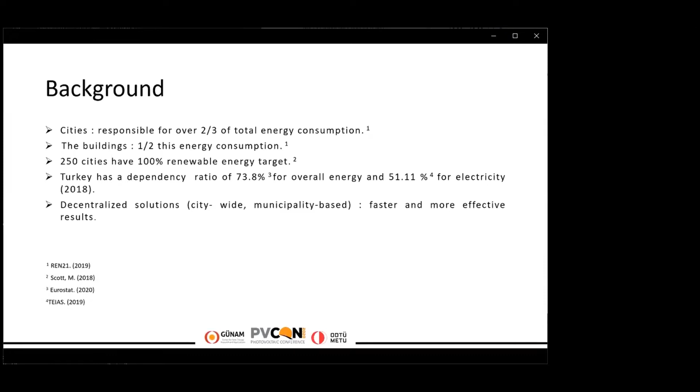Before going into the details of our study, I would like to mention some rooftop PV potential studies. As I said before, it is getting more common to use renewables, and there are some studies explicitly focusing on rooftop PV potential, such as in Spain, Italy, Germany, Israel, India, and Japan. Besides, some cities have strict regulations, such as Dezhou, Vienna, and Freiburg. For example, in Dezhou, China, almost every roof is covered in solar panels. In Vienna, it is obligatory to use rooftop PV in new buildings.

There are 2 studies about the PV potential in Turkey, and we wanted to contribute a city-based potential study, considering the fact that Ankara has a higher solar irradiation yield and more public buildings than most European cities. For these reasons, we want to propose an accurate methodology which is reliable, free, open-sourced, and most importantly, applicable to every type of roof.

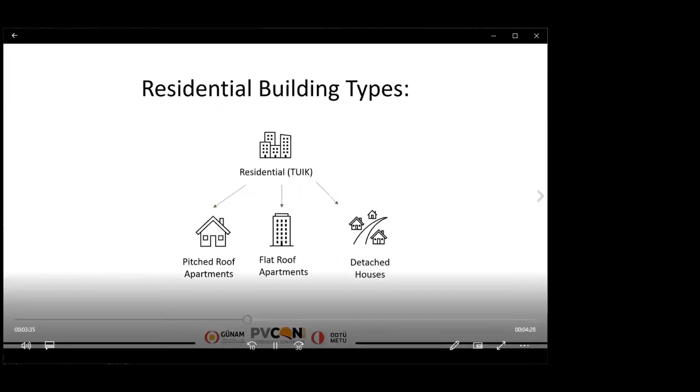In this study, we have used 3 types of residential buildings: pitched roof apartments, flat roof apartments, and detached houses. Since there are no specific data for roof areas, we have revised the data for residentials. We have calculated the floor base area of buildings by dividing the total building area by floor numbers. By doing so, we have assumed that floor base areas are equal to the roof areas. As a side note, we have only included buildings built after 2000 to make sure that we do not have any roof stability problems.

Let's have a closer look at our samples. The buildings are selected randomly from different parts of the city of Ankara. Among these samples, 12 of them are pitched roof high residential buildings, 2 of them are flat roof apartments, and 3 of them are detached houses. From the table you can see the rooftop type, number of floors, number of dwellings, and the roof area.

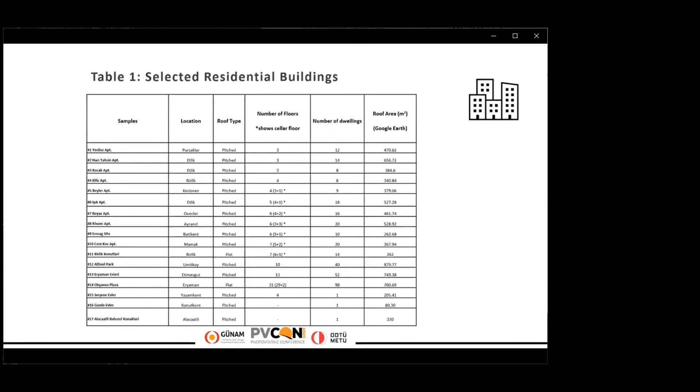For all samples, monocrystalline silicon, polycrystalline silicon, and bifacial modules are settled. For pitched roofs, modules are installed as flush mount, and the optimum tilt angle is selected as 32 degrees for Ankara. In order to reduce shading effects, we have calculated the row spacing by considering either the roof area or the module type.

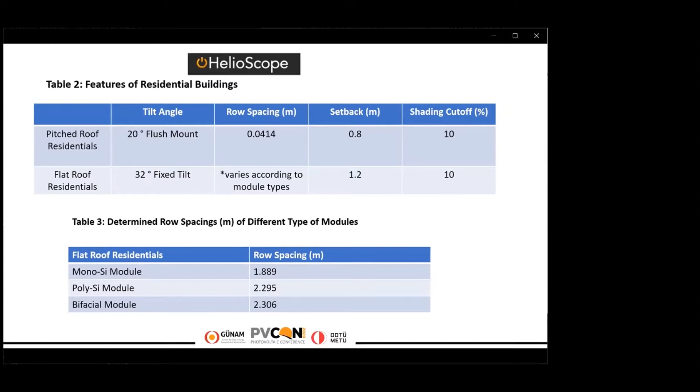Now, to make it more visual, I'd like to show you some pictures. Sample 1 is a high residential building roof, and sample 15 is a detached house. And you can see 3 different applications. First one is mono-Si application, second one is poly-Si application, and the last we have the bifacial application.

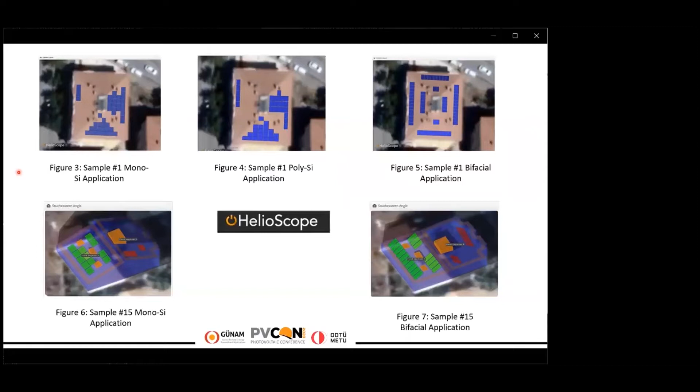The usual settlement for rooftop PV is that it's free of modules in the north side. Although this doesn't create too much difference in 4-segmented roofs, it creates a significant difference for bifacial PV in 2-segmented roofs. And we have used HelioScope tool for these simulations.

Here we can have a look at one of the applications. It is for monocrystalline silicon PV modules. Number of PV modules and the annual energy yield values came from the HelioScope application results. By multiplication of number of modules and the module area, we have found the usable area, and then the usable area ratio is found by the division of total roof area measured by Google Earth.

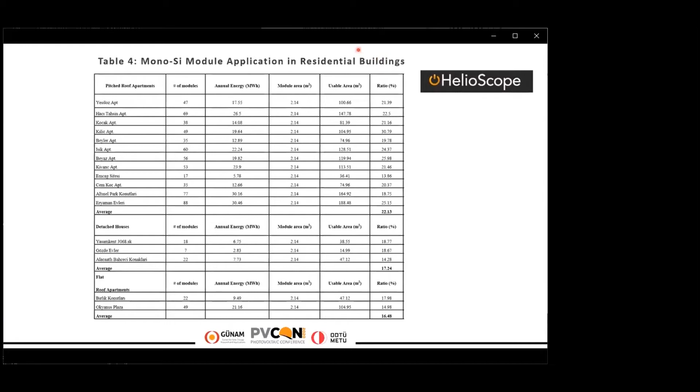After finding the suitable area constants, we reapply these constants to the total roof area with the help of TÜİK data. And what do we mean by that? The suitable area constants, which are found in table 4, are multiplied with the total floor area and the settleable module number in this area is found. Then the total energy is calculated for each module, since the yield is highly dependent on spacing, module area, and module types.

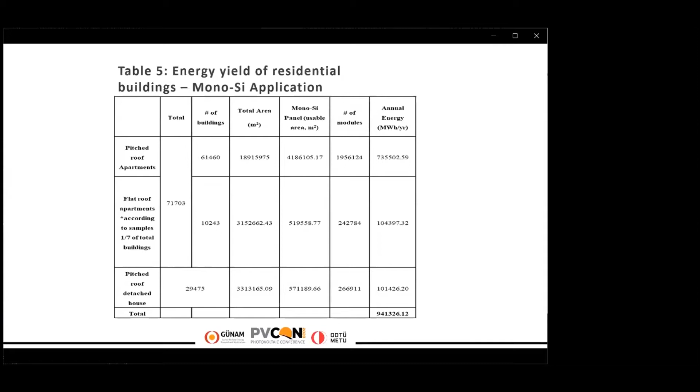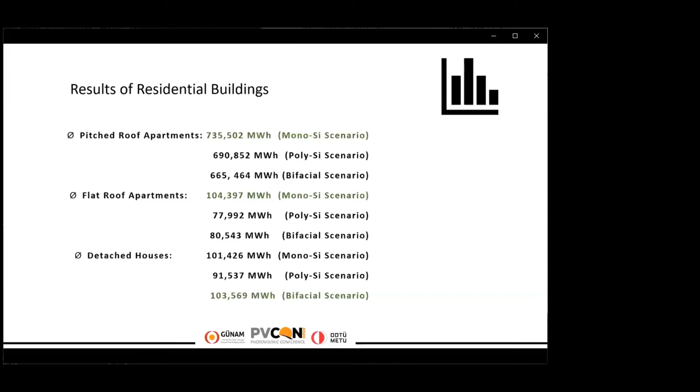Let me move on to the results of this study. You can see the results for the 3 different types of module application to 3 types of residential buildings. For pitched and flat roofs, monocrystalline silicon PV modules perform the best, and for the detached houses, it's the bifacial PV modules. As I said before, main difference occurs for bifacial PV in detached houses for 2-segmented roofs. But these results do not necessarily mean that one type of module is superior to the others. It shows how important the module size and row spacing are in limited roof area.

To conclude, we have performed an analysis to observe the rooftop solar potential in Ankara. Results show that the energy yield of the PV system is highly dependent on the building and its roof type. If the row spacing arrangement is done to the buildings individually, the potential would be higher due to the better settlement for shadings. Moreover, 2,500 buildings are added to Ankara every year, so we can say that the potential keeps increasing.

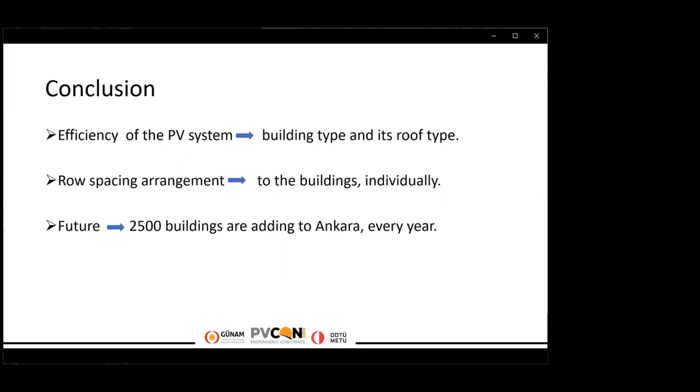For the future studies, we would like to complete this study on a much bigger scale, including more buildings for a longer period of time. Besides, a feasibility analysis will also be conducted to get a more realistic view of the rooftop solar potential.

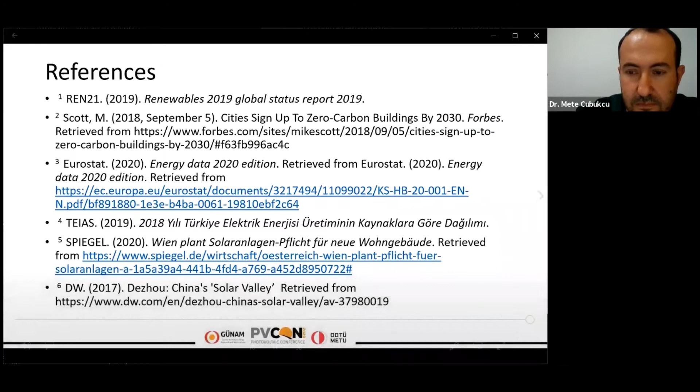I don't see any question on the message part, but I want to ask one question. When you share the results of your study, you have mentioned the megawatt hour production. So this is the energy production. What about the installed capacity of the PV systems according to your calculation?

Mhm. That was only the results of one application, one type. Are they right? I mean, normally when we mention this type of studies, we share first the installed capacity of the systems, then we can also share the predicted energy production. But I have just noticed you only share megawatt hour. Is it megawatt hour or just megawatt, the installed capacity?

No, it's megawatt hour, it's annual energy yield, and it is simulated results, so it's a theoretical study, we can say. Yeah, it's a prediction. We estimated it will be megawatt hours for annual energy production. Okay, thank you very much.

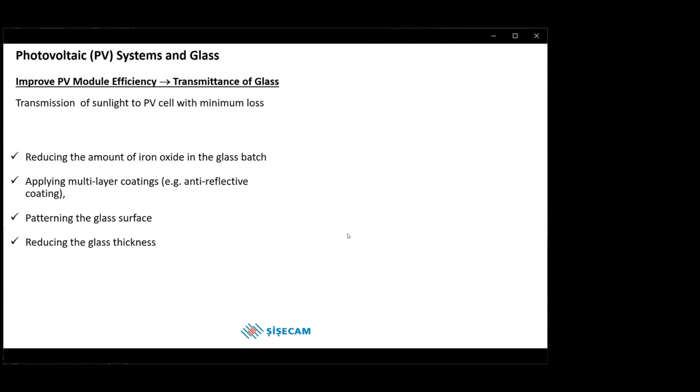The amount of produced energy in photovoltaic systems significantly depends on the properties of cover glass. It's always desired that the sun rays passing through the cover glass reach the cell with the least possible loss. To get higher efficiency from photovoltaic systems, studies are concentrated on different strategies, such as reducing the amount of iron oxide in the glass batch, applying multilayer coatings like anti-reflective coatings, and patterning the glass surface.

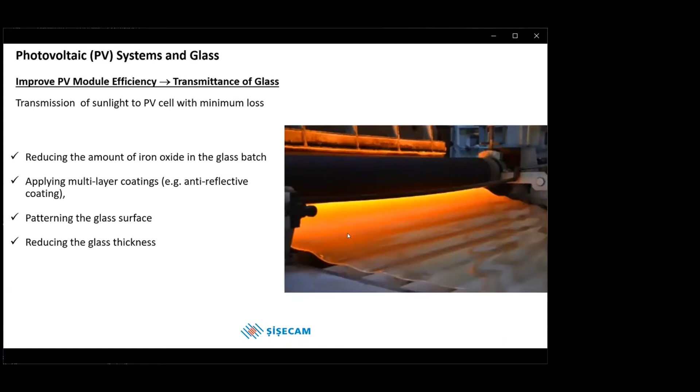The patterned glass surface allows more light transmission than the float glass surface. Patterned glasses direct the light coming to the surface of the glass and allow it to return inside, reducing reflection losses.

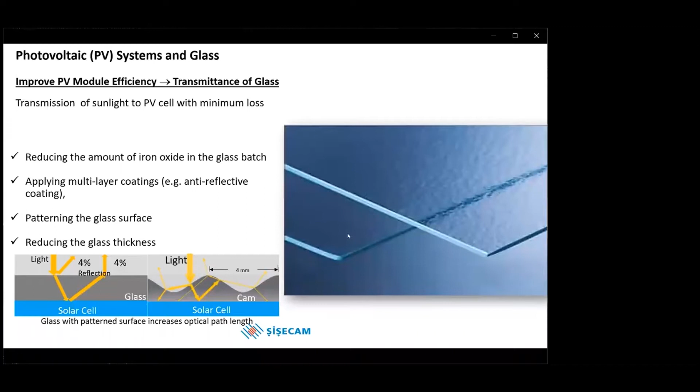Reducing the glass thickness, thinned glass used in photovoltaic modules has become one of the highlights of the glass industry. It has been determined by previous studies that the thinner the glass, the higher the permeability of the glass. However, as the glass thickness decreases, the strength values also decrease.

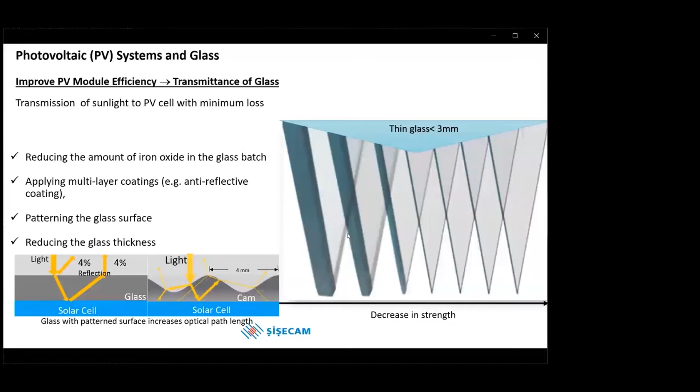At this point, the chemical tempering process is used to increase the strength of thinned glass. Let's start with the chemical tempering process. The process needs relatively high temperature, and it's performed below the glass transition temperature.

Potassium nitrate is the most widely used salt in this process. It's an ion exchange process, exchange of smaller alkali ions like sodium in the glass matrix and larger alkali ions like potassium in the molten salt bath. Ion exchange is realized in alkali-containing glasses. By this ion exchange reaction, a compression layer is formed on the surface, thus strengthening the glass.

The usage area of chemical tempered glasses is increasing day by day. Chemical tempered glasses can be used in automotive, luxury vehicles such as yacht glasses, display technologies, and glasswares.

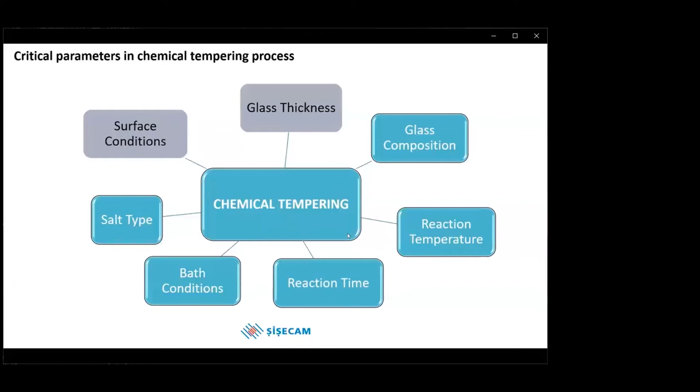There are many parameters affecting the chemical tempering process, like surface conditions, glass thickness, glass composition, reaction temperature, reaction time, bath conditions, and salt type. In our study, we focus on glass surface conditions and glass thickness.

In our project, we have completed our research on two main topics. We studied with 2 mm soda-lime silicate glass composition. First, we examined the chemical tempering behavior of patterned glass and compared it with float glass. Then we examined the influence of glass thickness on the chemical tempering process. Finally, the resistance of chemical tempered patterned glasses against atmospheric conditions was examined.

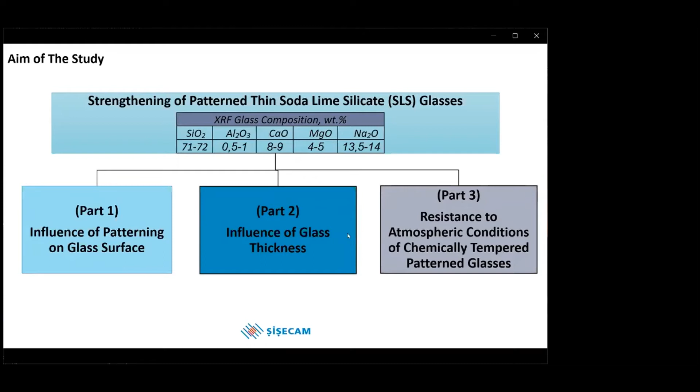Let's look at our experimental studies briefly. In the study where we examined the chemical tempering behavior of patterned low iron glass, we cut our glass samples in certain sizes and then cleaned them with demineralized water and isopropyl alcohol in ultrasonic baths. We carried out the chemical tempering process at 450 degrees for 4 hours. Time and temperature values were selected in accordance with information obtained from the literature and experimental studies we have done before.

Then the results were compared with the results obtained in the study with float glass. In the second part, where we examine the effect of thickness, we compare 2 mm and 3.2 mm patterned glasses in terms of chemical tempering behavior. In the last part, the resistance of chemically tempered patterned glasses to atmospheric conditions such as humidity, salt, acid, and abrasion was examined.

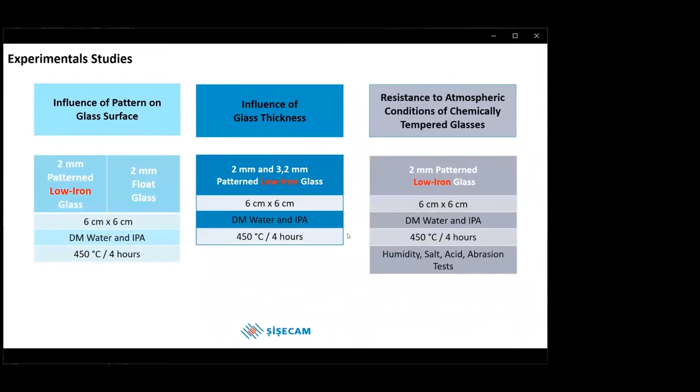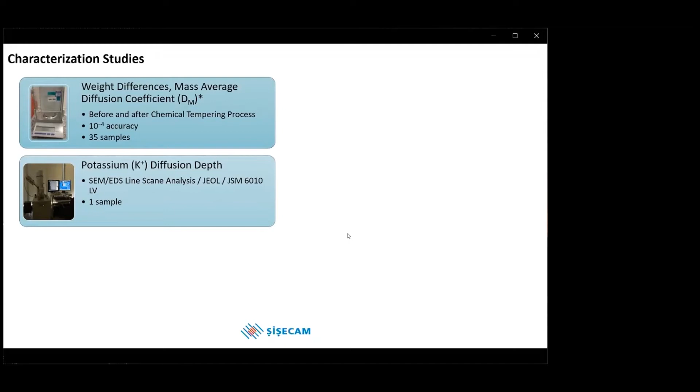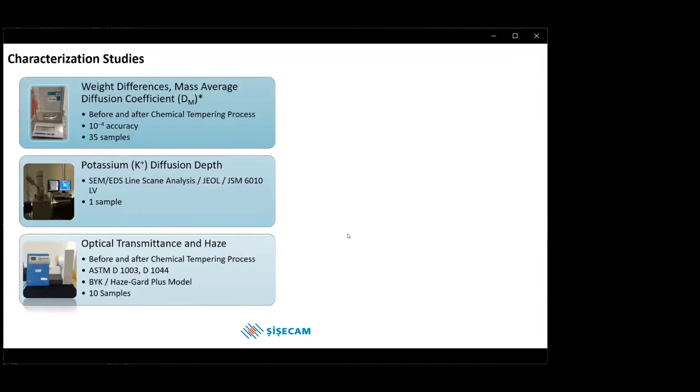These are our characterization studies. In order to determine the weight difference and mass average diffusion coefficient, the samples are weighed before and after the chemical tempering process. SEM-EDS line scan analysis was performed to measure the potassium diffusion depth depending on potassium concentration. Optical transmittance and haze measurements were performed before and after the chemical tempering process. White light interferometer was used to determine the surface roughness.

Fracture load was determined by using ring test.

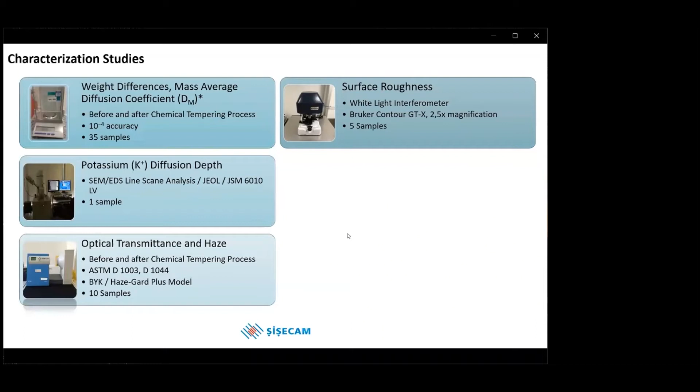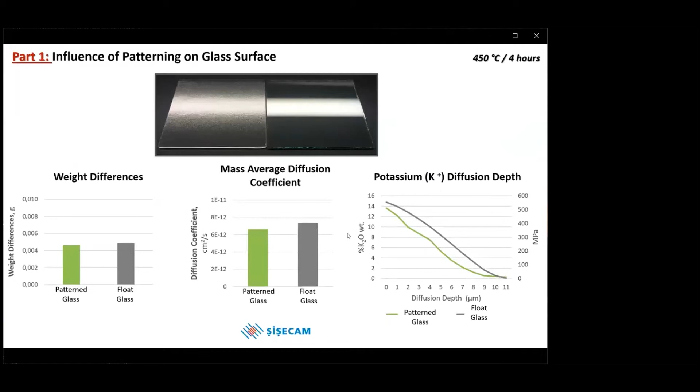Let's continue with the first part. This slide shows the patterned and float glasses which were chemically tempered at 450 degrees for 4 hours, and the weight difference before and after the chemical tempering process, the diffusion coefficients, and depth of potassium ions in the glass after the chemical tempering process. It's seen that the highest weight difference value, the highest diffusion coefficient values, and the highest potassium diffusion depth values were obtained for the 2 mm float glass sample.

When the surface roughness values of patterned and float glass were compared, it was seen that the surface roughness values increased with the application of patterning on the glass surface. There was no significant change in the surface roughness values with the chemical tempering process applied to patterned and float glasses.

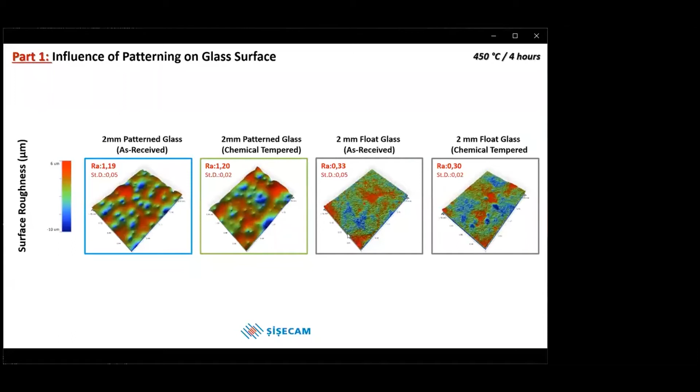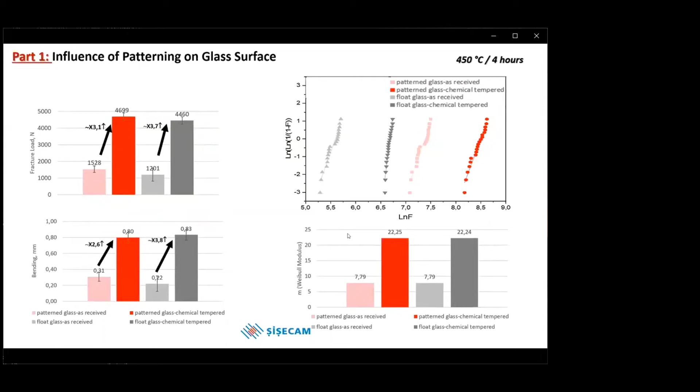As a result, when the chemical tempering process is applied to patterned and float glasses, it has been determined that the fracture load values are more reliable than the as-received glass.

When the optical transmittance and haze values before and after chemical tempering were examined, there was no significant difference between the samples. It has been observed that the decrease in the iron content in the glass composition and the application of patterns on the glass surface increased the optical transmittance values.

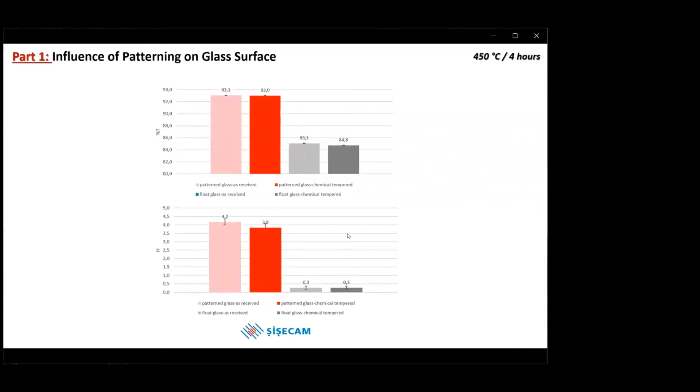In this part, 2 and 3.2 millimeter patterned glasses were compared in terms of the weight differences before and after chemical tempering, the diffusion coefficients, and depth of potassium ions into the glass.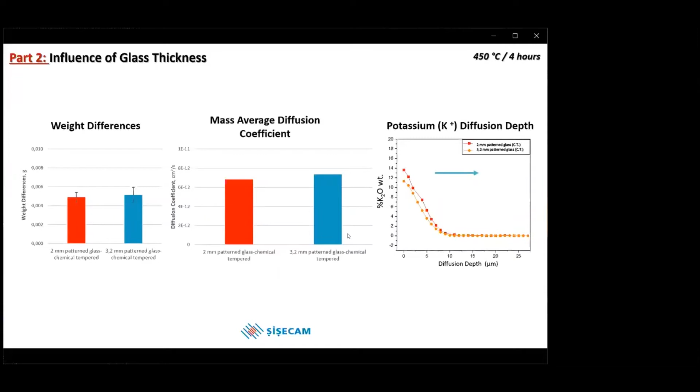It was observed that there was no significant change in diffusion coefficient values. Potassium diffusion depth of 3.2 millimeter thick patterned glass was found to be slightly higher than 2 millimeter patterned glass.

When we look at the surface roughness values, while surface roughness values don't change with the chemical tempering process, roughness values increase with the increasing glass thickness.

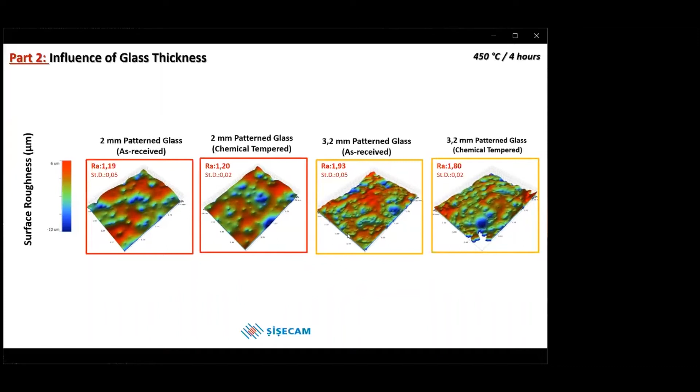It has been observed that the fracture load values increase with the increasing thickness of the sample. According to results, after chemical tempering process, the fracture load value of the 2 millimeter pattern sample increased up to 3 times, while the fracture load values of the 3.2 millimeter pattern sample increased up to 4.4 times.

When we look at the bending values obtained during the ring-on-ring test, it was determined that the bending values of 2 millimeter glass after chemical tempering are higher compared to 3.2 millimeter glass.

With the chemical tempering process, the Weibull modulus of both 2 millimeter and 3.2 millimeter thick samples increased to 22. As a result, it has been determined that when chemical tempering is applied to glasses of different thicknesses, the glass became mechanically more reliable.

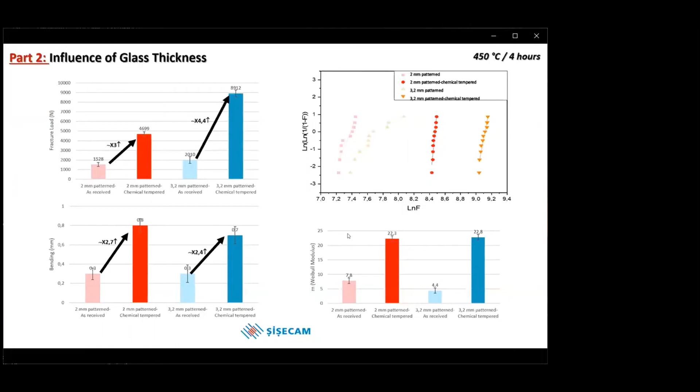Let's continue with the last part. In this part, the resistance of chemically tempered patterned glasses to atmospheric conditions such as humidity, salt, acid, and abrasion was examined. These are our test parameters according to standards.

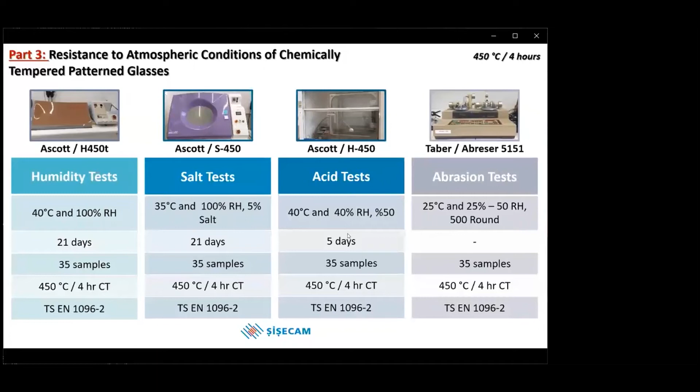In this slide, ring-on-ring test result values are given. Although a slight decrease was observed in the fracture load values after the atmospheric condition test, it was determined that no significant change was observed because these values were within the standard deviation values.

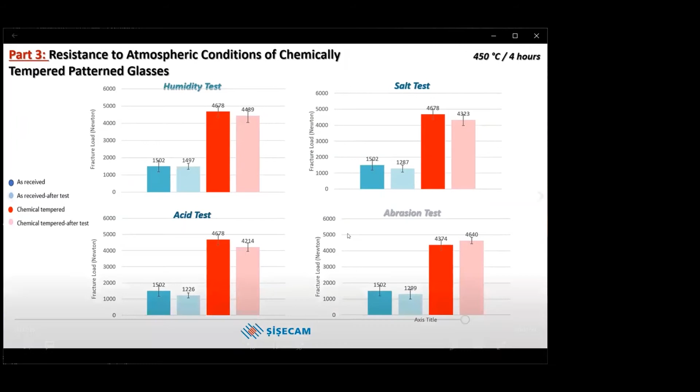Weibull diagrams were drawn using the values obtained from the ring-on-ring test. It was observed that the Weibull modulus increased after chemical tempering. It seemed that the Weibull modulus of chemically tempered glass samples decreases after the test with atmospheric conditions.

As a result, it has been determined that the chemically tempered glasses are more reliable than as-received glass in terms of resistance to atmospheric conditions.

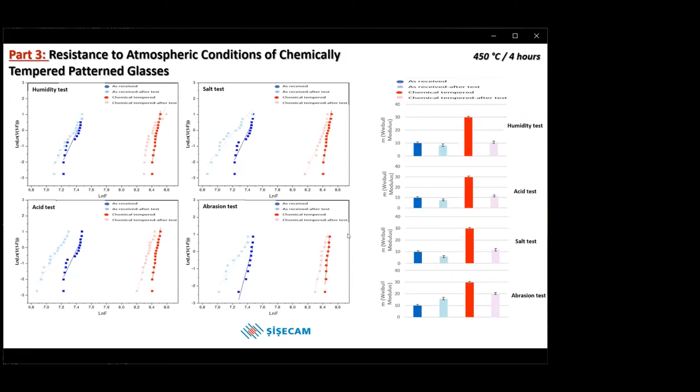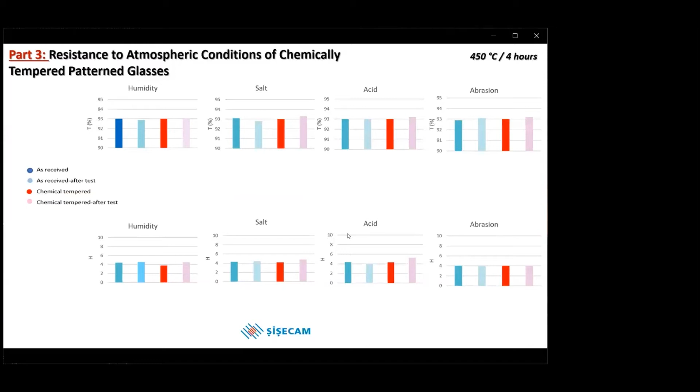When the optical transmittance and haze values before and after chemical tempering were examined, no significant difference were observed in the transmittance values of the glass samples.

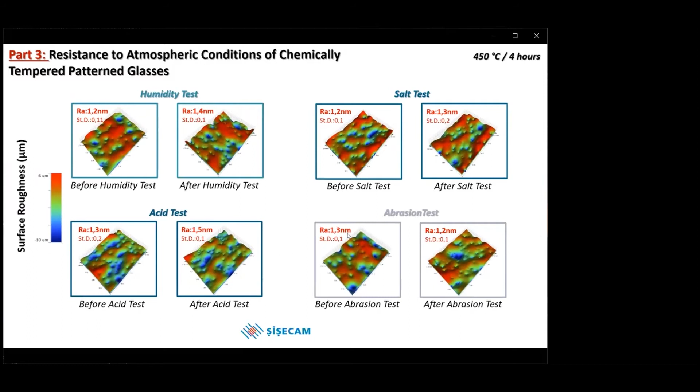And when all the results are evaluated, it has been proven that low iron pattern thin glasses instead of float glass can be used as a cover glass, obtaining a higher efficiency in the photovoltaic systems without any loss of mechanical properties.

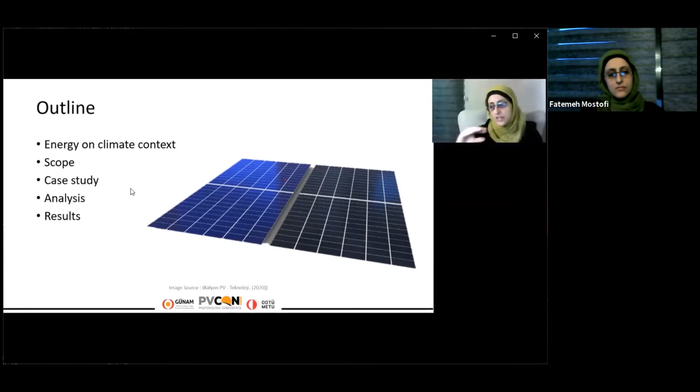Today we are going to talk about the structural performance of the roof of an existing building under the additional load of PV panels. First we talk about energy in today's climate context, then define the problem using a case study to better illustrate it. Then we perform finite element analysis over this case study to see if the roof of this existing building can carry the additional load of PV panels. At the end, we shortly reflect on the results.

As you know, the growth in population, along with increased fossil fuel consumption, results in larger volumes of greenhouse gas emissions, which in turn cause changes in our surrounding environment. We are having hotter summer days and colder winter days, which requires more energy for these extreme seasonal conditions. This brings us back to using more fossil fuel consumption. So in order to break this negative loop, we need to use renewable energy instead of fossil fuels.

Fortunately, during the past decades, there have been good technologies converting renewable energy into heat or electricity. One of these, whose cost has fortunately been decreasing over the past few years, is the photovoltaic panel. These photovoltaic panels directly convert solar photons into electricity, and they have very good potential to be used in a wider context.

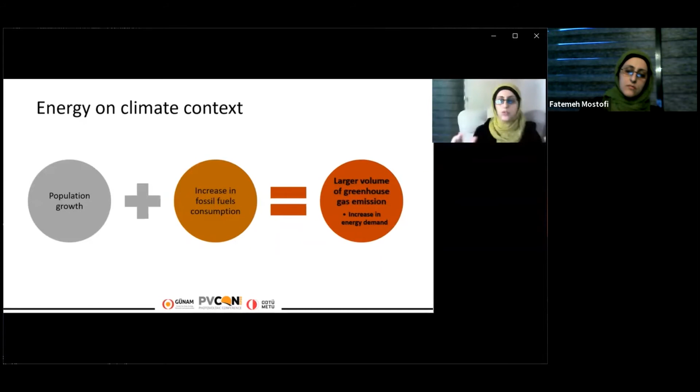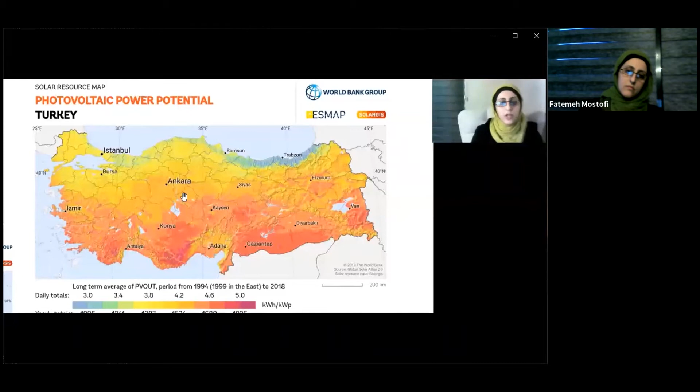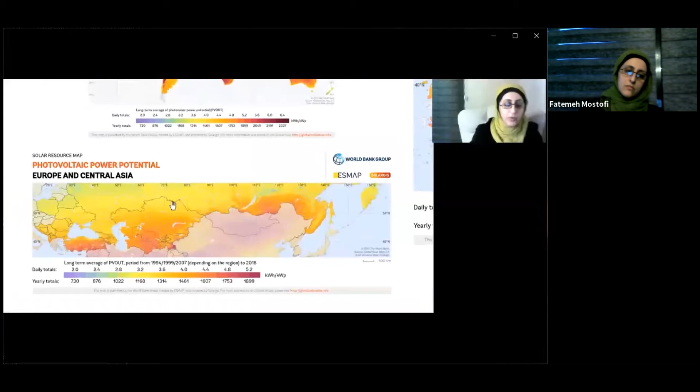So Turkey has very good photovoltaic potential, and it remains for engineers and designers to fulfill this photovoltaic potential through wider application of these photovoltaic panels.

One of the areas we can use these photovoltaic panels is on the rooftops of existing buildings. For new buildings, we don't have any problem, as we can easily integrate PV panels into the design. But for existing buildings, we face a challenge.

When we want to install PV panels on the roof of existing buildings, we don't know if these already aged structures can carry this additional load, and that stops many from using PV panels on aged buildings. So on one side we have the PV panel loads, which we need to check the building can carry, and on the other side we have the aged structure, so we have to evaluate the existing performance of the aged structure in its current condition.

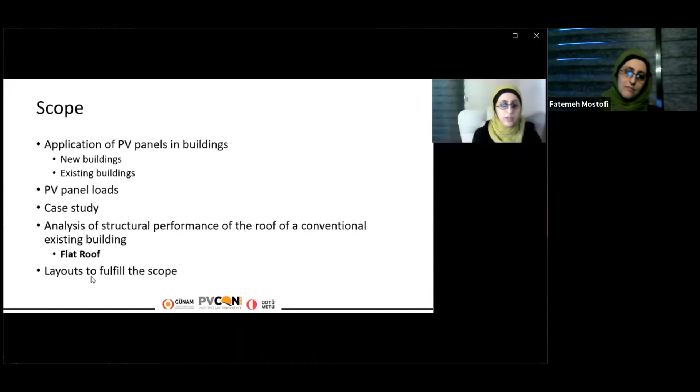For the PV panel types, we selected two typical PV panels easily found in Turkey: monofacial PV panels and bifacial PV panels. As their names suggest, one absorbs solar photons from only one side, while the bifacial PV panels absorb solar photons from both sides, offering much higher efficiency. That's why its thickness is about 4 millimeters, more than the monofacial PV panels.

Though they are almost the same length, 2 meters length and 1 meter width, the imposed load from the bifacial PV panels is slightly more, in terms of load per square meter, than the monofacial PV panels. That's why we consider the load of the bifacial PV panel in our case study. In addition to the self-weight of the PV panel, we have the self-weight of the installation equipment coming along with these PV panels, the racks and flashings.

We have to consider the weight of this installation equipment. In addition, we consider the load combination of this self-weight plus the snow load, which we need to consider for sure. There is no way out of it.

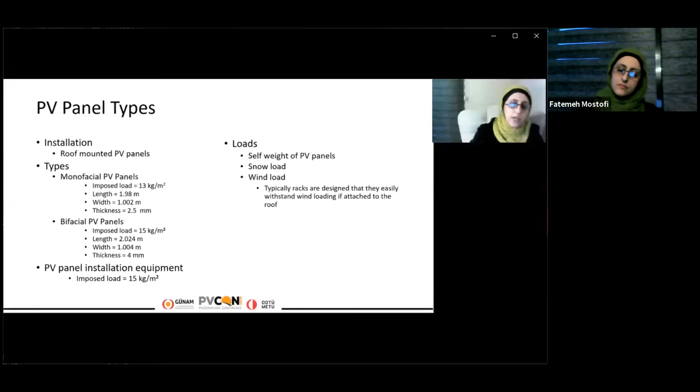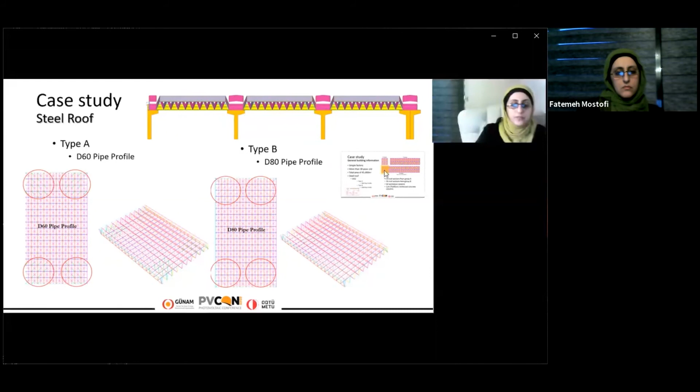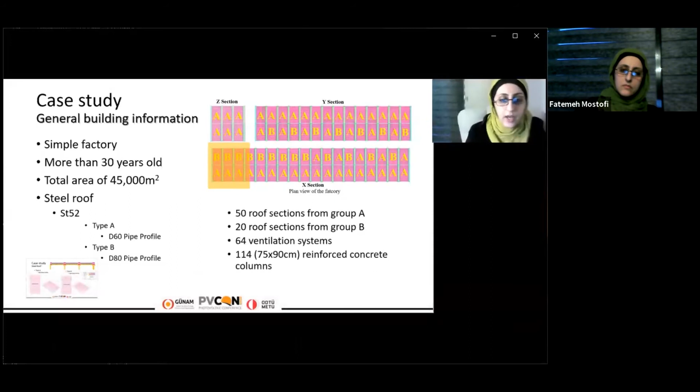And what we have done, we have selected a portion of this roof to perform the finite element analysis over this. This selection allows us to generalize the analysis result for further replication for other, larger parts of this plant, and also we can use this for other conventional buildings sharing a similar nature. And of course, we save calculation cost. We can have better calculation cost here.

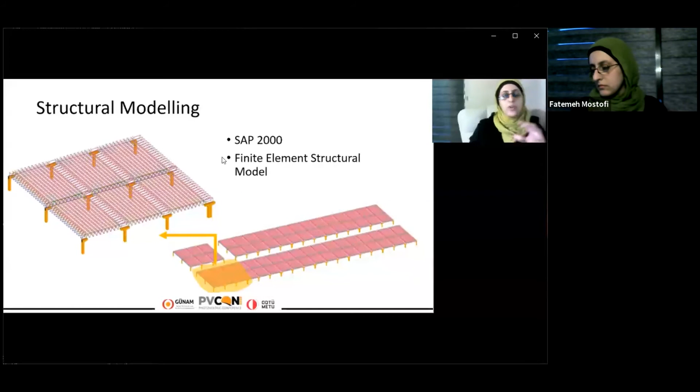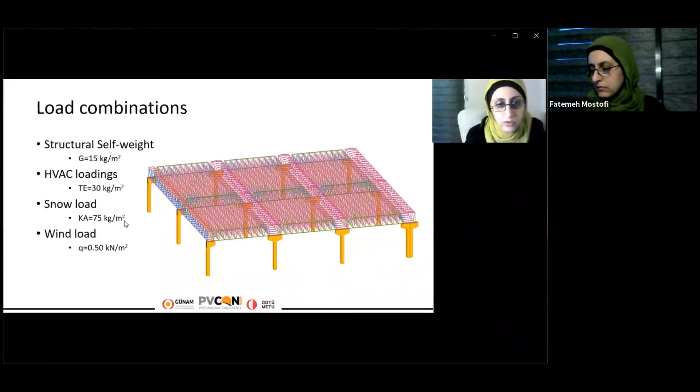So here is our structural model. We have modeled it using SAP 2000. After performing the finite element modeling, we first considered the existing condition of the building under the normal loading condition which the building should carry. So we have added the self-weight of the building, HVAC loading, snow, and the wind loading to our finite element models as defined here.

Then we have defined three loading patterns. Why have we done that? We wanted to see if the roof of the building can be reinforced only using minor reinforcement on some of the critical parts, or we need to do some major operations there before installing the PV panels. We have three loading scenarios as shown here.

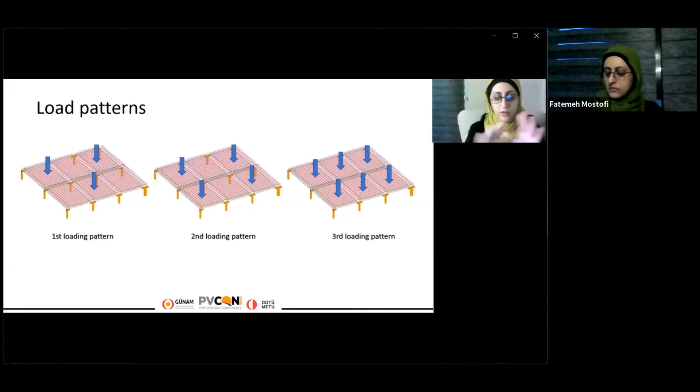First, we just partially load our panels here, here, and here. In the second loading scenario, we leave the two middle panels empty and only load the roof at the side. And the third loading scenario is our most critical scenario, which is our main focus, and we fully load our roof with full panels over the roof.

So this is the existing condition of the building. This is the aged building simulation without the load of the PV panels. We have recorded a deflection of 3.43 centimeter under the dead load plus the ventilation loading, which is a very important consideration here. We have to consider the ventilation loading for all types of similar structure.

150 elements have failed under this condition, and when we added the snow load in our load combination, we have seen that almost double the number of elements failed. 315 elements failed under the stress applied by this conventional loading, without the PV panel load actually. And we have also observed double the deflection here, 7.18 centimeter. And our central elements dividing the A and B sections are our most critical elements here.

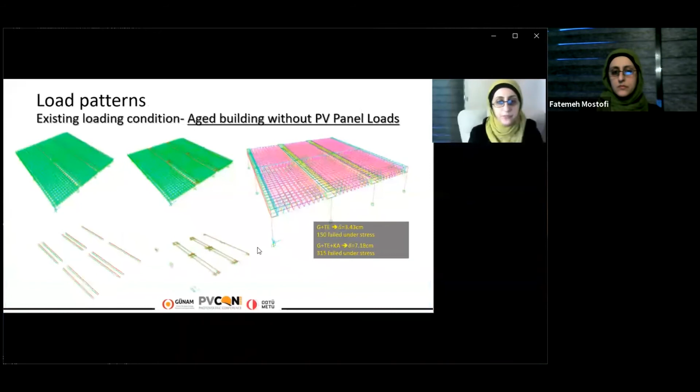Then we have applied our PV load patterns. First, we have just applied the PV loadings, and then we have applied 15 kilogram per square meter of PV loading in addition to 15 kilogram per square meter of supporting equipment loading. So we have a more critical loading scenario here. Here we have observed an increase in deflection and in the number of elements failing under this additional PV panel load compared to the unloaded structure. In terms of the PV panel load, I mean the unloaded structure with only the normal loading.

And then we have performed the same analysis for the second loading pattern and the third loading pattern. It was interesting that in the second loading pattern, when we haven't loaded the central part, compared to the third loading pattern, we haven't observed much difference.

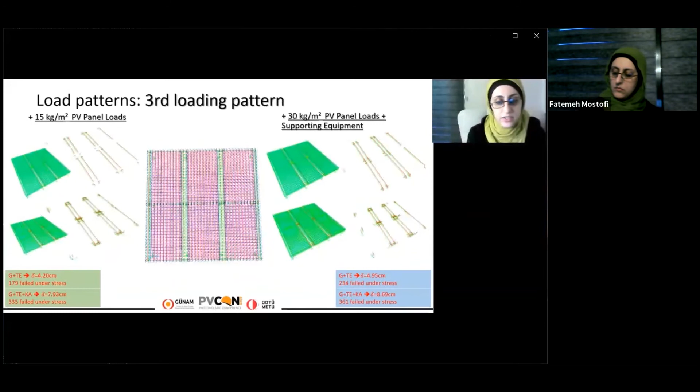And here, these are the load patterns under both the PV panel plus the installation equipment loads. So this is our most critical case. So when we compare the normal condition under the snow load combination with the additional ventilation and the dead load of the structure, we had only 315 elements failing under this condition.

But when we are coming to our fully loading pattern scenario, the third loading case, under the same condition, we see that 361 members are failing. Actually, a considerable increase in the number of members failing under the additional load of these PV panels. Even without the installation equipment, we still have 335 members failing, but only a smaller increase in members failing under this stress.

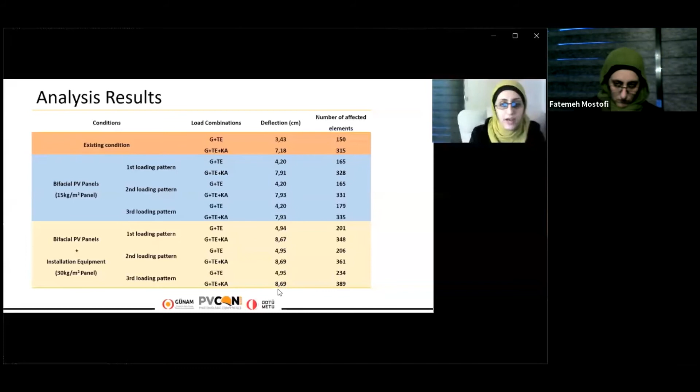But for sure, we cannot use the existing building roof and install the panels directly over it, because the members would fail, and we have also experienced 1.5 centimeter additional deflection here. So it's not practical to use the existing aged building as it is and install the photovoltaic panels here.

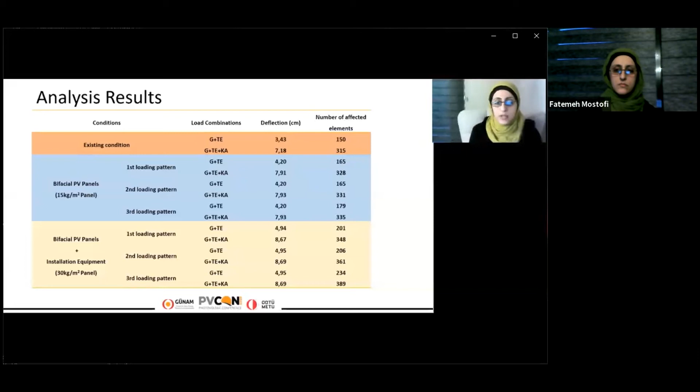So we recommend considering the cost of additional roof support as part of your feasibility study when dealing with aged buildings having a conventional flat roof. However, it should also be mentioned that this additional support brings other benefits to the project, which usually can justify the additional cost, as PV panels usually come with a warranty or maintenance period of 25 years. So an aged building without a new support structure would cause many problems for both PV panel providers

and building occupants. So building the additional support on top of the flat roofs reduces future maintenance work in relation to these panels, and also helps us design this additional steel roof with the optimum angle, so we can achieve higher efficiency in our PV panel projects. Besides, we can avoid shading. Usually, when we want to install these panels, we want to avoid shading. So this can offer benefits which would justify the additional cost.

This additional supporting roof adds cost to our PV panel projects, and it still makes it a feasible project, especially considering the 25 years of this project. So even a small amount of efficiency coming from this additional steel roof support can bring a huge benefit to our project in the long term.

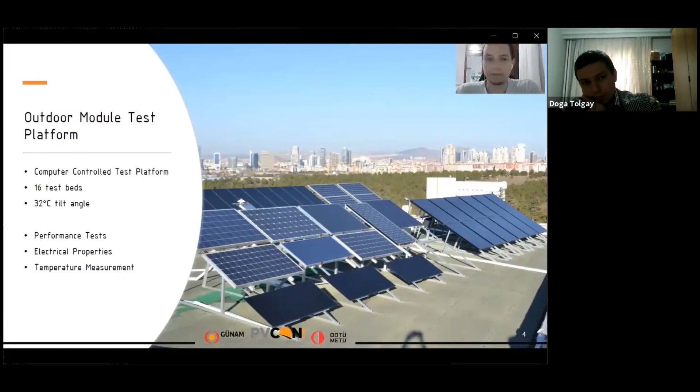We have made our measurements in the outdoor module test platform while preparing this paper. The outdoor module test platform is on the rooftop of the Physics building. It contains 16 test beds, which are tilted at a 32 degree angle. These beds are connected to the computer-controlled test platform, in which we make performance tests, we measure electrical properties, and, the subject of this paper, we make temperature measurements. This brings me to the features of the modules.

We have used 5 different modules. These modules are the CIS, the monocrystalline silicon, the polycrystalline silicon, micromorph-based amorphous silicon, and the HIT. The CIS module has 130 watts and it is active since October 2014. The monocrystalline silicon module supplies 160 watts and it is active from April 2012. Polycrystalline silicon is active since May 2012 and it supplies 130 watts, whereas the microcrystalline silicon and amorphous silicon tandem structured solar module provides 128 watts and it is active since April 2012. The HIT module provides 230 watts and it is active since April 2012.

We have used different temperature estimation formulas that HOMER, HelioScope, PVsyst, and PVsol use in their yield estimations and efficiency estimations. The temperature estimation formula used by HOMER uses module parameters such as the efficiency and the temperature coefficients. Whereas the temperature estimation formula used by HelioScope uses empirically determined coefficients like A and B, and HelioScope also takes into account the wind speed.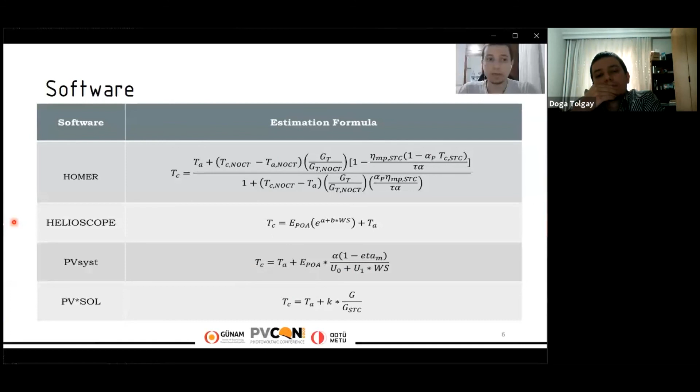The estimation formula used by PVsyst uses the efficiency, the empirically determined coefficients, and the wind speed also. Whereas PVsol uses only one constant, which is called K, and it only depends on the installation conditions. We have selected these 4 estimation formulas because they are generally used in the industry, so it is a good study to work on them. We have divided our 4-year data into 16 different categories. These categories are divided according to the irradiance and ambient temperature.

From category C1 to C4, the irradiance value is the same. However, the ambient temperature value changes. In every 4 categories, the irradiance value is the same, whereas the ambient temperature value changes. And when you pass from C4 to C5, the irradiance value changes, whereas from C5 to C8, all categories have the same irradiance value, but they have different ambient temperature values.

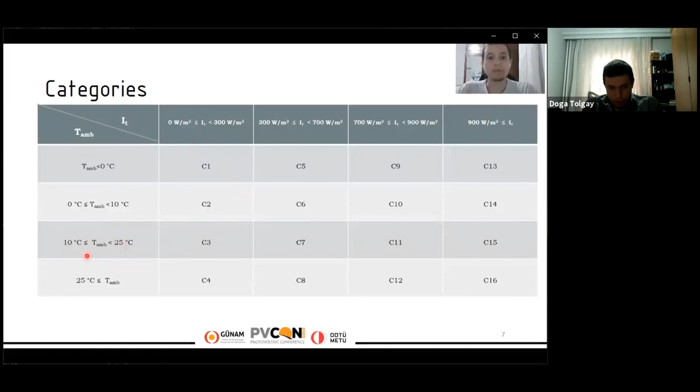For C1, the ambient temperature value is below 0, and the irradiance value is between 0 to 300. For all C2, C3, and C4, the irradiance value is the same, but for C2, the ambient temperature is between 0 and 10 degrees. For C3, the ambient temperature is between 10 and 25 degrees, and for C4, the ambient temperature is higher than 25 degrees, and the other categories also follow this trend.

This brings me to the error calculations. The error calculation is done according to the measured temperature minus the estimated temperature; we have subtracted the estimated temperature from the measured temperature in order to find the error made by the estimation formulas. And after finding this, we have calculated the mean absolute error and the root mean square error.

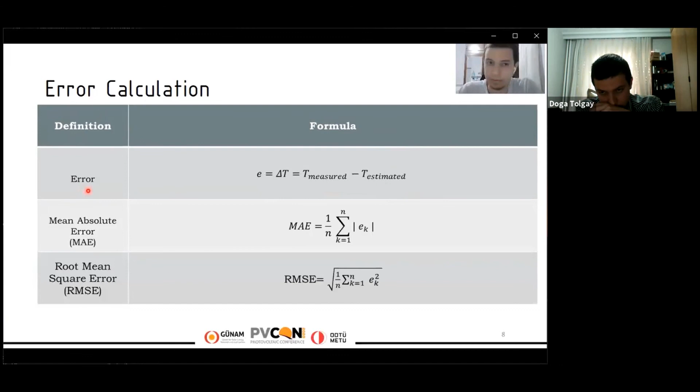We have generated 64 different graph groups, from 4 different temperature estimation formulas and 16 different categories. In this graph, you can see only one graph group, which belongs to the category 1 Helioscope group. Category 1 means the low irradiance and low temperature category. In these graphs, you can see that the mean absolute error and the root mean square error are low. However, although they are low, the errors can reach up to 20 degrees and minus 10 degrees in the middays.

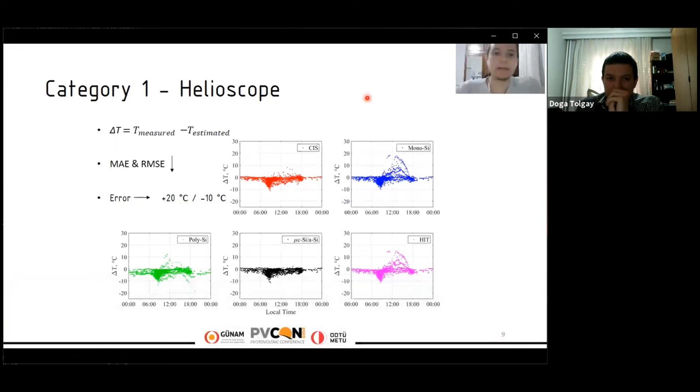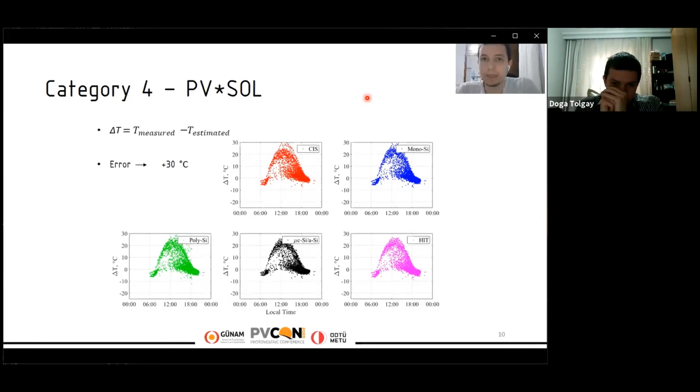So it is a clue that as the module temperature increases, these temperature estimation formulas are subject to make more mistakes. And similarly, in this graph, you can see the category 4 and PV-SOL group, where the errors made in the middays can reach up to 30 degrees. And it is again a clue that in the middays, the errors made by the temperature estimation formulas are higher. And we think that this is mainly due to the higher module temperatures.

In this graph, you can see the temperature estimations done by different temperature estimation formulas according to the categories. In category 1, the first five represent the estimation formulas for category 1. The subsequent 5 represent the estimation formulas for category 2, and the other 5 represent the estimation formulas for category 3.

The CIS module is represented by the red line, whereas the best estimation for the monocrystalline silicon module is represented by the blue line, the polycrystalline silicon module is represented by the green line, the micromorph silicon and amorphous silicon tandem structure module is represented by the gray line, and the magenta line represents the best estimation for the HIT module.

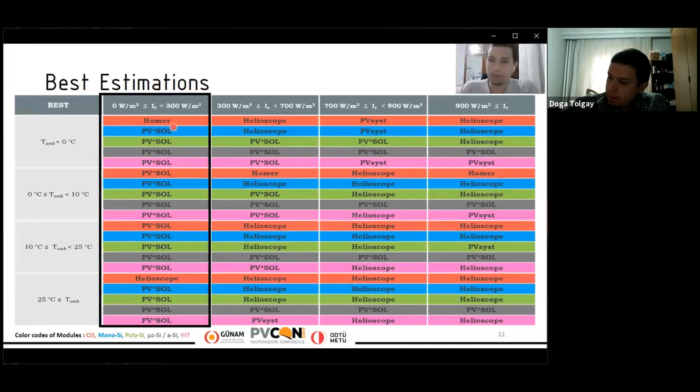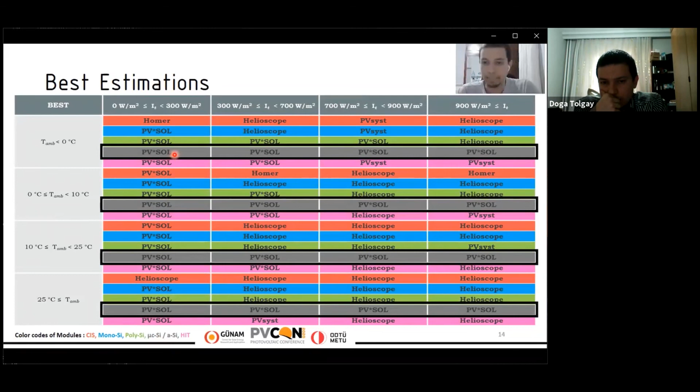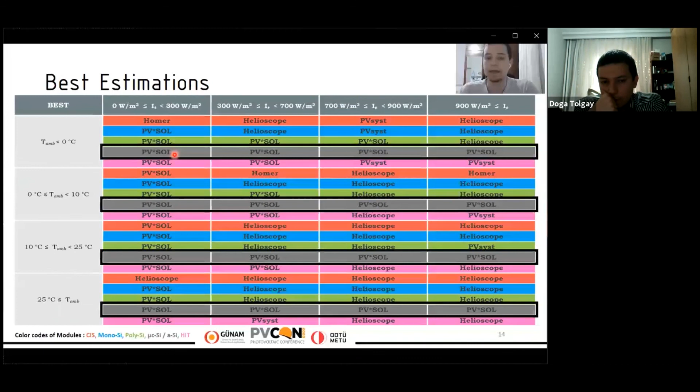In this graph, you can observe that when the irradiance is low, PV-SOL makes the best estimations. And when the irradiance increases, the estimation formula that Helioscope uses starts to give better results. And you can see that for the tandem structured module, micromorph silicon based amorphous silicon, PV-SOL always makes the best estimations. Independent of the irradiance value and the ambient temperature value, the temperature estimation formula that PV-SOL uses makes the best estimations for the micromorph based amorphous silicon.

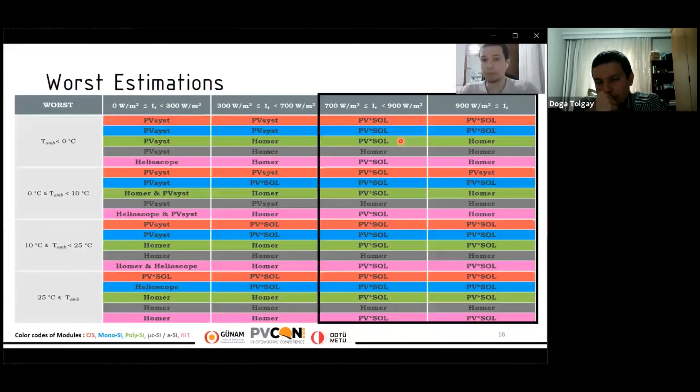As for the worst estimations, you can see in this graph that the worst estimations for high irradiance values are made by the temperature estimation formula used by PV-SOL. Remember that when the irradiance is low, PV-SOL makes the best estimations. But when irradiance increases, the temperature estimation formula used by PV-SOL starts to make the worst approximations.

And this brings me to the conclusions. I want to remind you again that we made our measurements in the cold and semi-arid climate in Ankara. Although the mean absolute error and the root mean square error are low, the temperature difference between the measured and the estimated values is between minus 10 degrees and plus 20 degrees. The temperature difference can reach up to 30 degrees in noon hours. As the ambient temperature increases, the temperature difference between the measured and the estimated values also increases.

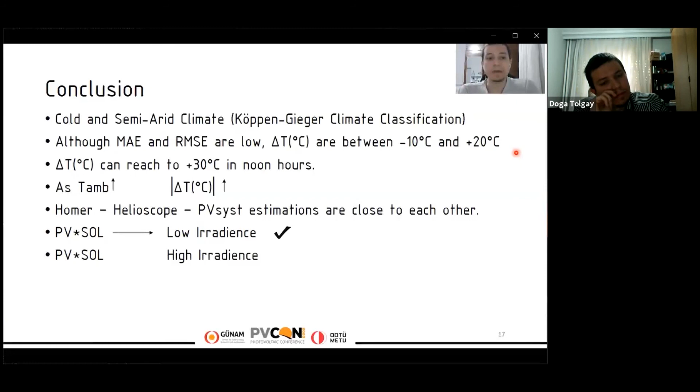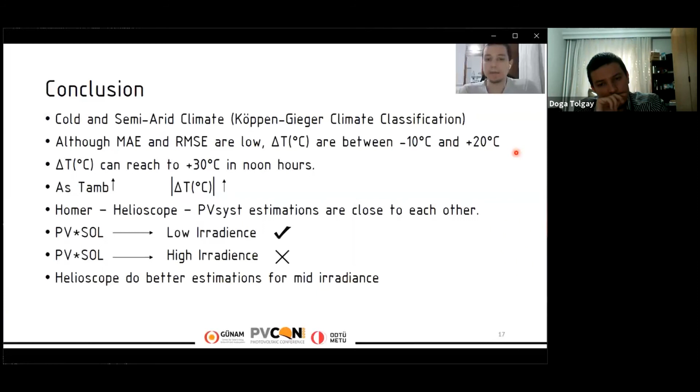The Homer, Helioscope, and PVsyst estimations are close to each other. The estimation formula used by PV-SOL can be used when the irradiance is low, and it is not recommended when the irradiance is high. And Helioscope makes better estimations for mid-range irradiance.